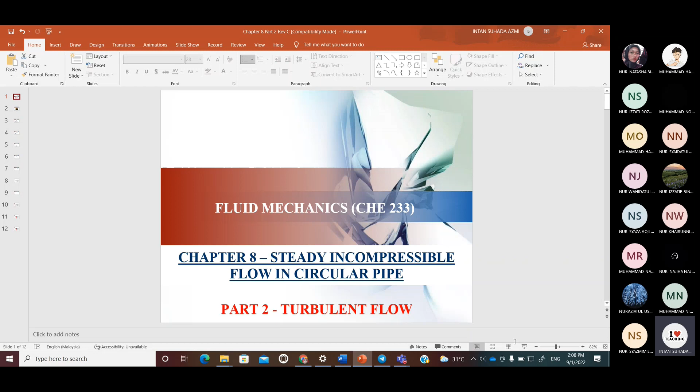Right, so today we will continue with chapter 8, part 2. So in chapter 8, part 1, what is the name for the equation that you learned to derive? Anyone? Iqbal, what equation did you derive in chapter 8, part 1? Poiseuille's equation. Hagen-Poiseuille equation. Okay. Thank you, Irfan, for your answer.

Okay, so that one is quite an important derivation. I think the step is not quite confusing. The step is quite straightforward, just quite long. But if you focus and you write it out, inshallah you will understand how to derive the Hagen-Poiseuille equation.

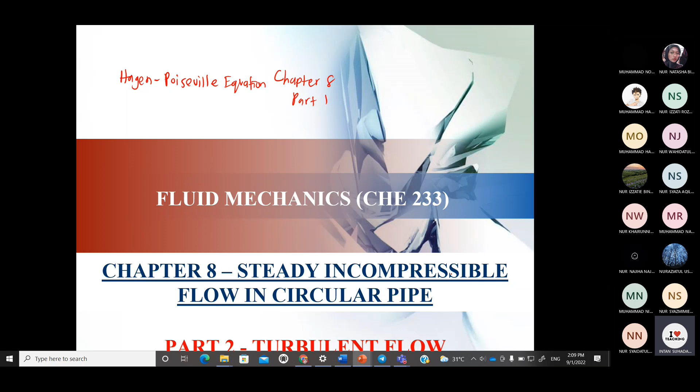Alright, so in chapter 8, part 2, Hagen-Poiseuille only applies for laminar flow. So in chapter 8, part 2, we want to focus on turbulent flow.

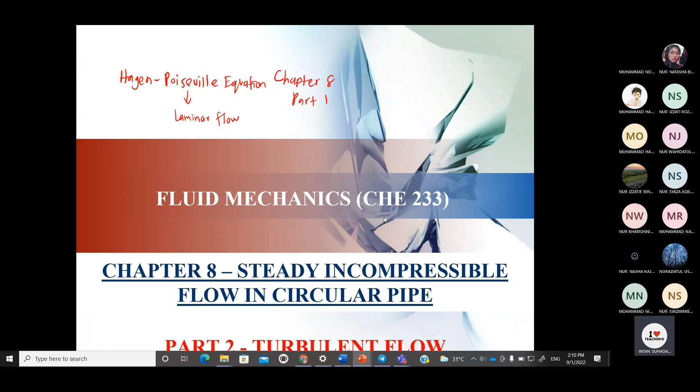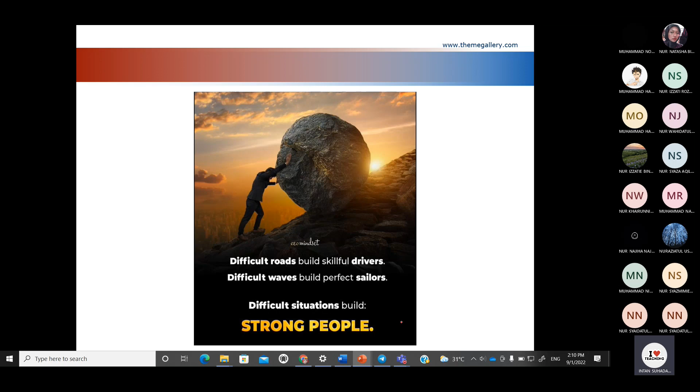Okay, so as usual, before we start learning, I will give a motivational quote. As you can see here, difficult roads build skillful drivers. Difficult waves build perfect sailors. So we can conclude that a difficult situation will build strong people. Do you agree with me? Come on, guys, respond. Yes, madam. Okay, so please remember this.

Alright, so we move on to our main agenda. The objective for chapter 8 part 2 is to acquire the fundamental characteristics of turbulent flow. The keyword is turbulent flow; chapter 8 part 1 was laminar flow. There are 4 learning outcomes. First, you will learn how to calculate pressure drop, delta P. Second, calculate head loss due to friction, h_f, using the Darcy-Weisbach equation.

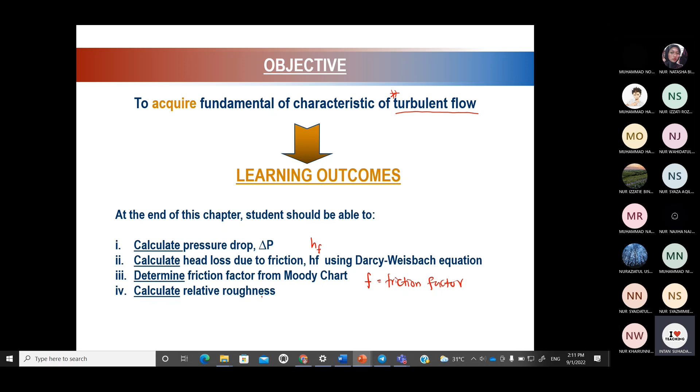Third, to determine the friction factor, denoted as small f, from the Moody chart. Later I will teach you how to get the friction factor from the Moody chart. The last one is to calculate relative roughness.

Alright, so we go straight to the friction factor formula. For a horizontal pipe configuration, delta P is pressure drop, right? Pressure drop is equal to... small f is the friction factor, or it can be termed the Darcy friction factor.

So this symbol is the absolute roughness of the pipe wall. If you divide absolute roughness by diameter, you get relative roughness. So be careful: if the question gives you absolute roughness, you must change it to relative roughness by dividing it by diameter. So this is the equation for pressure drop, and this is the equation for friction factor.

So as you can see, the friction factor depends on Reynolds number and relative roughness. As I said before, be careful. If the question only gives you absolute roughness, you should divide it by diameter to change it to relative roughness in order to get the correct friction factor.

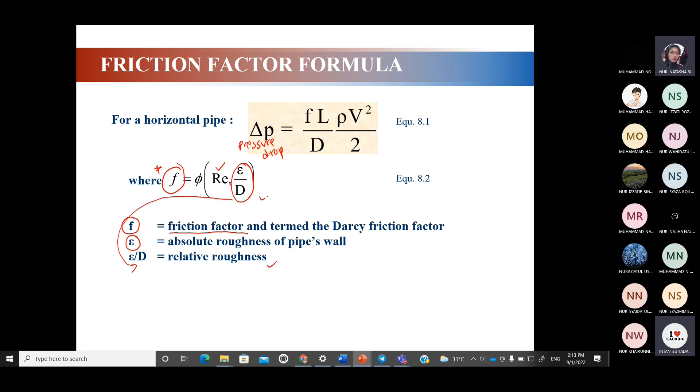Okay, so the energy equation for steady incompressible flow. Can anyone tell me the name of this equation, without h_f first? You have used this equation a lot, right? Bernoulli. Yeah, Bernoulli. Who gave me the answer? Ifan? Yes, madam. Alright, thank you, Ifan.

So this is the Bernoulli equation. Please remember this equation. I can say it is the heart of fluid mechanics. Very important equation, right? Before this, you only learned this equation without h_f. So h_f is the friction head loss.

So in chapter 8, part 2, you have to consider head loss due to friction. That's why we add h_f into the Bernoulli equation, because we cannot neglect head loss due to friction in turbulent flow. With the assumption of constant diameter, this V is not volume, don't confuse, it's velocity, so velocity 1 equals velocity 2.

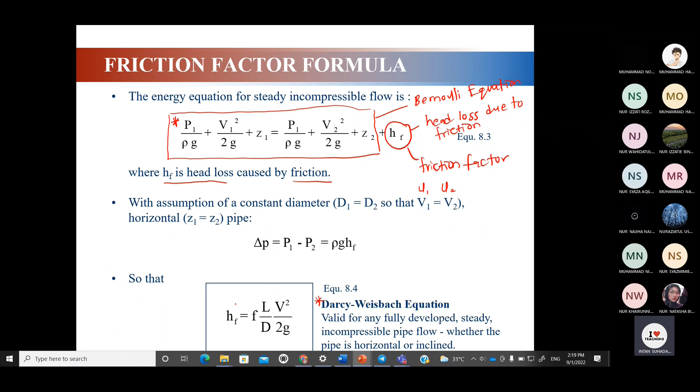Then how you get this one is, you insert the friction factor equation for HF here. HF here you substitute with the Darcy-Weisbach equation, then you will get this equation. I will write for you. P1 minus P2 equal to rho G Z2 minus Z1 plus rho G, and you substitute F L over D V squared over 2G.

Since we have G here and also here, we can omit G. So we are left with P1 minus P2 equal to rho G Z2 minus Z1 plus F L over D, and this rho I bring here, rho V squared over 2. So this is how you get this equation. Understand guys? Is it okay? Yes, madam. Okay, thanks for your response.

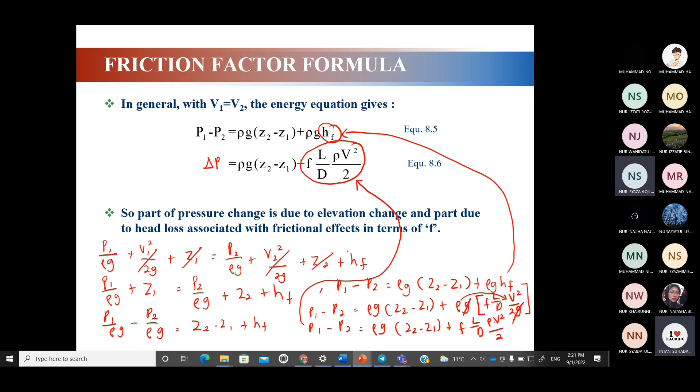So that's why I ask you to be careful. Don't simply use absolute roughness. Sometimes the question tricks you and gives you only absolute roughness. If you don't change it, you will get a wrong friction factor. So make sure you divide absolute roughness by diameter. If the question directly gives you relative roughness, you can directly use it.

So this is basically what the Moody chart has. In the chart you have Reynolds number, so you will have to calculate the Reynolds number, then you have your relative roughness, then you will get your friction factor. Later I show you when we solve the example.

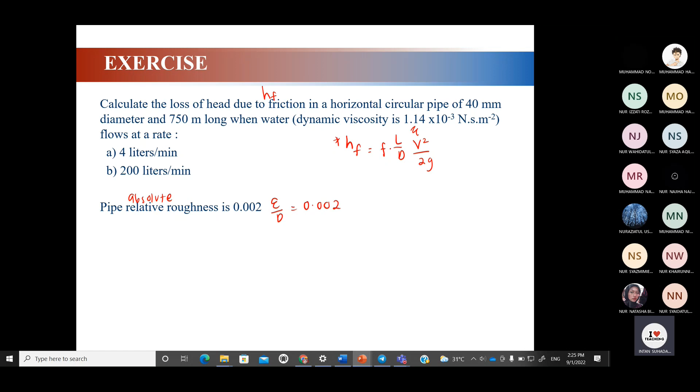Before that, you know that you have to calculate HF, right? So you write first the equation for HF, F L over D, V squared over 2G. If you write the equation, you know what info you should find in order to find HF. So you have to find the friction factor. How do you find the friction factor? It is from the Moody chart.

Moody chart. Okay. So length, the question already gave to you, right? 750, diameter also you have, right? g is your gravitational acceleration, okay? So as usual, 9.81. Then V squared you can calculate, okay?

So first step, you have to calculate Reynolds number. Okay, so Reynolds number equal to rho U D over mu. Okay, so this one you have learned in chapter 3, right? Reynolds number. Okay, so you should also know that flow rate is equal to velocity times area. Right, so you can find velocity U by dividing flow rate with area. Okay, then substitute this U into this one.

Okay, rho, so U equal to Q over A, right? So Q, I put A below. Okay, Q over A equal to U, then you have D and you have mu. Okay, so rho QD, then mu, so area of a pipe, pi d squared over 4, right? Okay, so then you bring this 4 here, so you will get 4 rho QD over mu pi d squared.

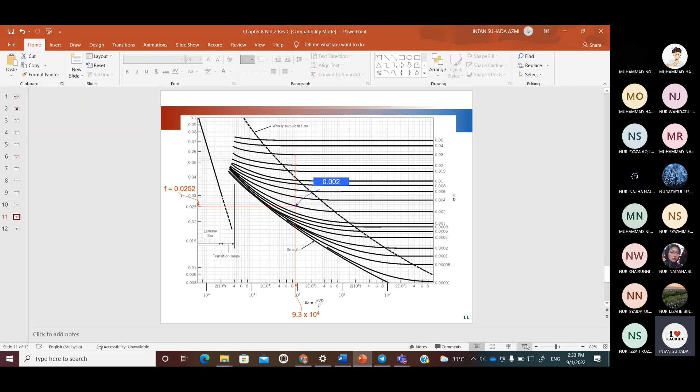I cannot see. Okay, so it's around 9.3 times 10 to the power of 4. So your relative roughness is 0.002, right? So the difference is, for turbulent, you have to consider relative roughness. Okay, I make it full slide. All right, so your Reynolds number is around here, 9.3 times 10 to the power of 4. Then you just drag the line until it touches this relative roughness line. So you choose the one with 0.002, so this is the line.

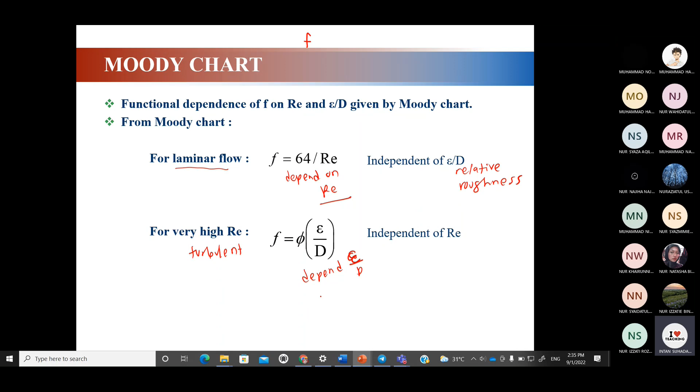Then from the intersection of your Reynolds number and your relative roughness, you draw a line to the y-axis friction factor, so you will get the friction factor 0.0252. For laminar flow, you can see that it will not touch the relative roughness. That's why for laminar flow it is independent of relative roughness; it just depends on Reynolds number. But for turbulent, it is independent of Reynolds number, but it depends on relative roughness. So that's why it's quite different how you read the Moody chart in case of laminar and in case of turbulent.

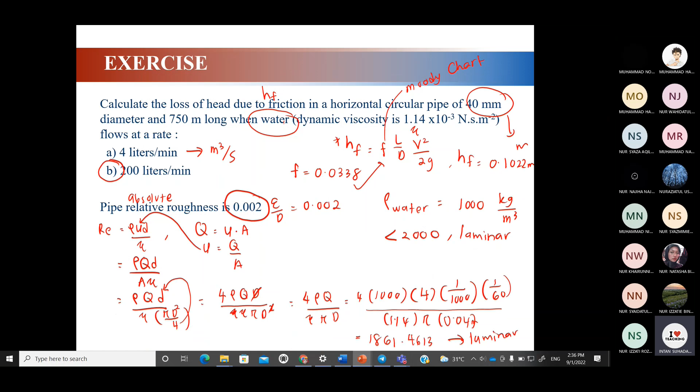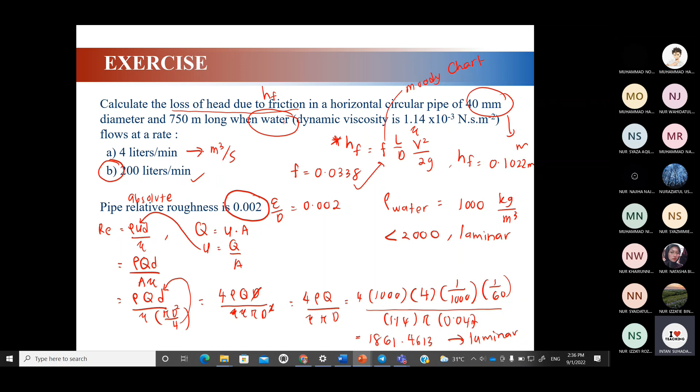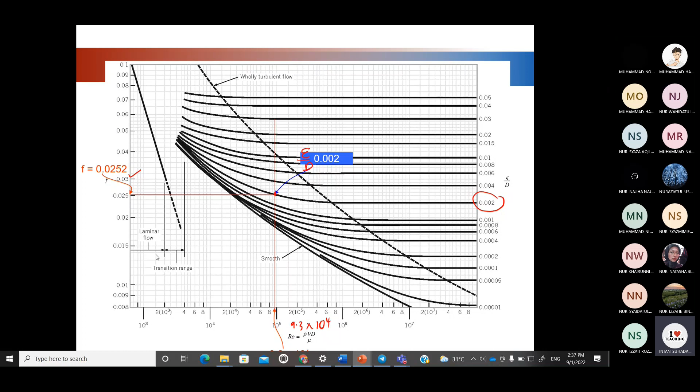So any question, guys? Actually, we have finished chapter 8, part 2. So if you have any question, you can ask, or no question at this moment. No question yet, madam. Okay, so later when you do your exercise or any question from final assessment, maybe you will have questions, right? So I think that's all.

Oh, wait, I want to download attendance list.